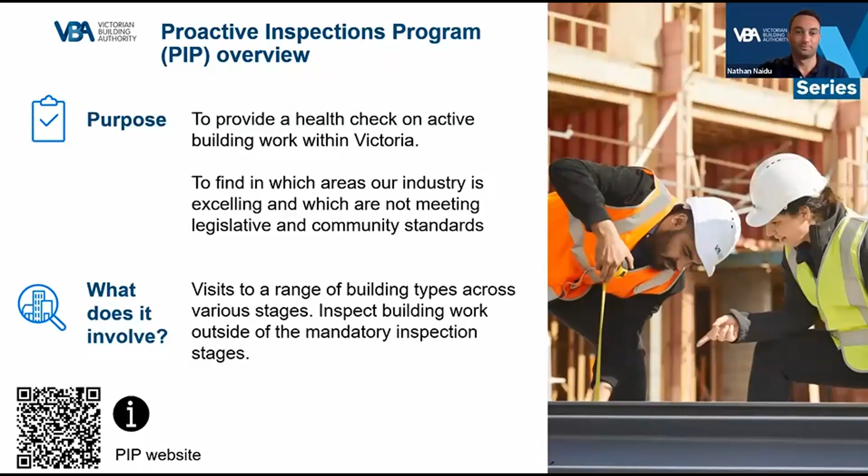Acknowledging that we are the Victorian Building Authority, post-COVID, the VBA have increased again their capacity to conduct inspections in regional Victoria to ensure we are able to assist stakeholders statewide deliver better and safer buildings. With initiatives such as the Build a Web program, we anticipate an even greater reach across Victoria over the next 12 months. It's becoming the norm for regional practitioners to have engagement with our field staff in regional Victoria.

Again, we've included a QR code at the bottom left corner of the screen, which will take you to further information about the Proactive Inspections program.

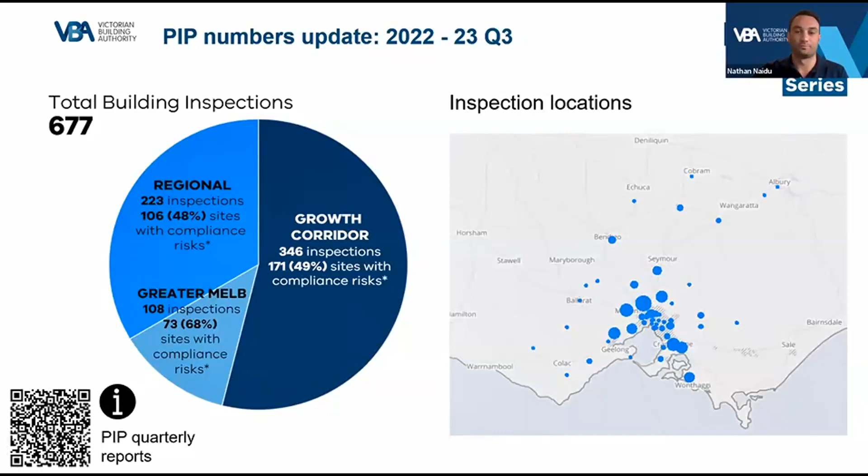Now, understanding our risk matrix. Each inspection conducted is assigned a risk level depending on the risks observed at the time of inspections. There are one of 4 possible outcomes for each inspection.

The first is a low risk pass. This indicates that no risk has been identified at the time of inspection and there are no apparent oversights in compliance. The second is a low risk.

This indicates a risk has been identified. However, we believe that the oversight in this risk will not cause significant harm to the project as it progresses and there is ample opportunity for rectification.

The third is a medium risk. This means a risk has been identified that, if left untreated, would cause an adverse effect on the performance of the building or compromise safety to the community. These are risks that are an oversight which should be attended to as soon as possible.

And lastly, we have a high risk. This means that a risk has been identified that appears to be a significant oversight and provides an imminent risk to the building or the community. In cases such as this, urgent attention is required to rectify the matter and the VBA will request a response within 7 days.

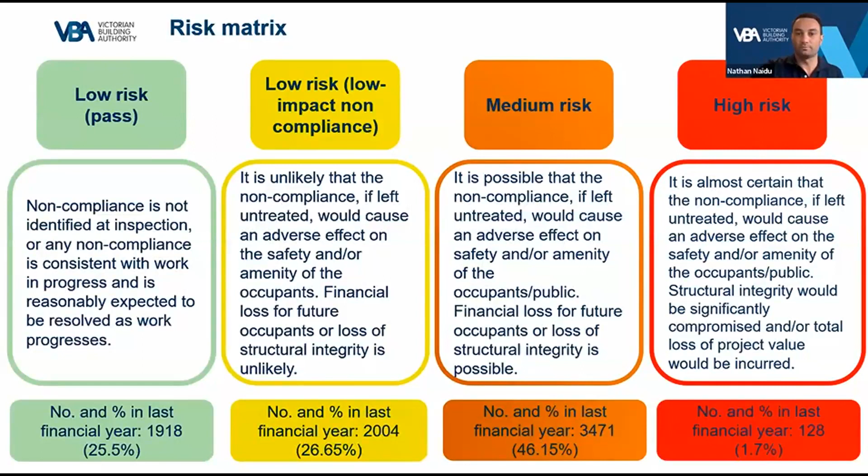Moving into the technical side of things, we'll start with slab reinforcement and concrete cover.

What is concrete cover? It's the thickness of concrete between the slab reinforcement and the edge of the slab, whether top, side, or ground. The two key purposes of adequate concrete cover are: first, it protects the reinforcement from the elements, safeguarding it from corrosion, with the concrete acting as a shield for the steel. Second, the steel remains well anchored within the slab, distributing and transferring loads effectively, allowing it to perform its best structurally. The end result of inadequate cover is a weaker slab.

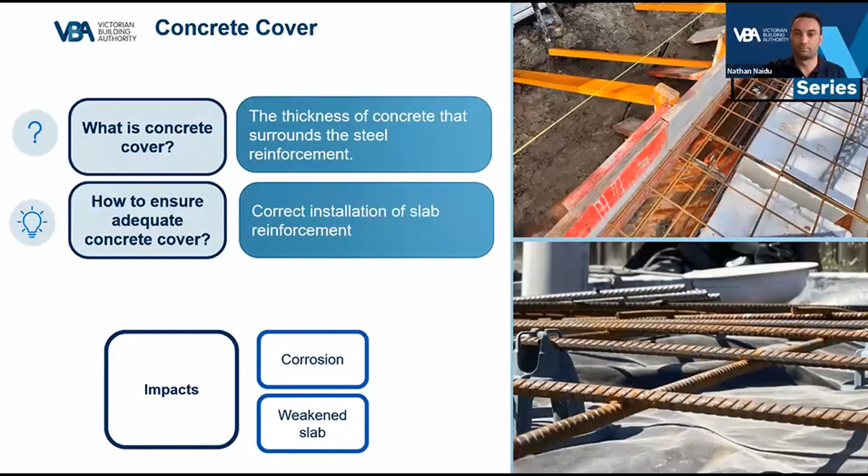The easiest and cheapest way to avoid issues relating to insufficient concrete cover is to ensure the steel is installed correctly prior to the slab being poured. The installation of even the simplest material, the humble bar chair, plays a crucial part in ensuring we achieve adequate concrete cover. The NCC requires the spacing of bar chairs to not exceed 800 mil, as well as steel to be supported off the ground, void formers, or waffle pods.

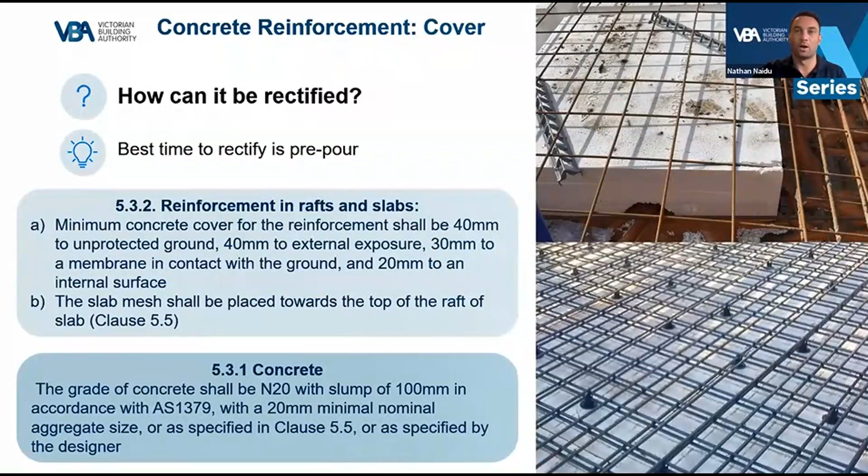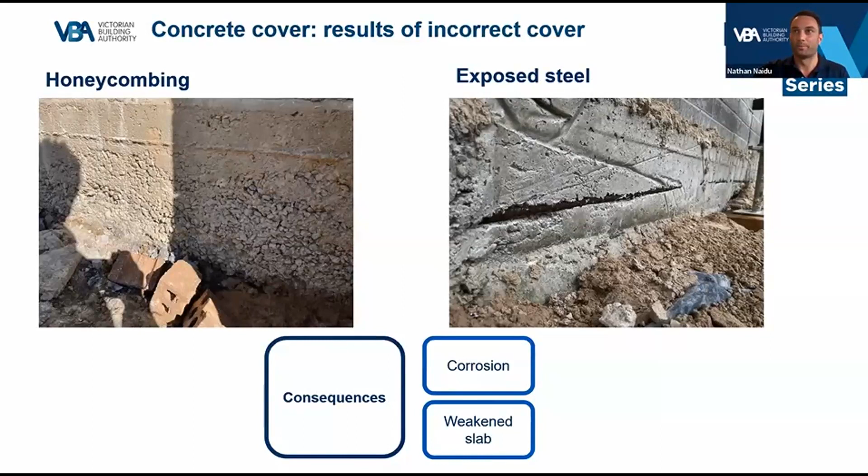Rectification works will likely involve cutting back part of the slab, treating the slab reinforcement, applying specially formulated products, and then rectifying the concrete finish. As you could imagine, the costs and time involved in obtaining rectification from your engineer, approval from your RBS, engaging a contractor to undertake those works, getting all the materials that you need, and then getting a re-inspection, those costs would be significantly greater than just getting the initial installation correct.

The photos shown are example only, and you would need to engage a design engineer and building surveyor for formal direction.

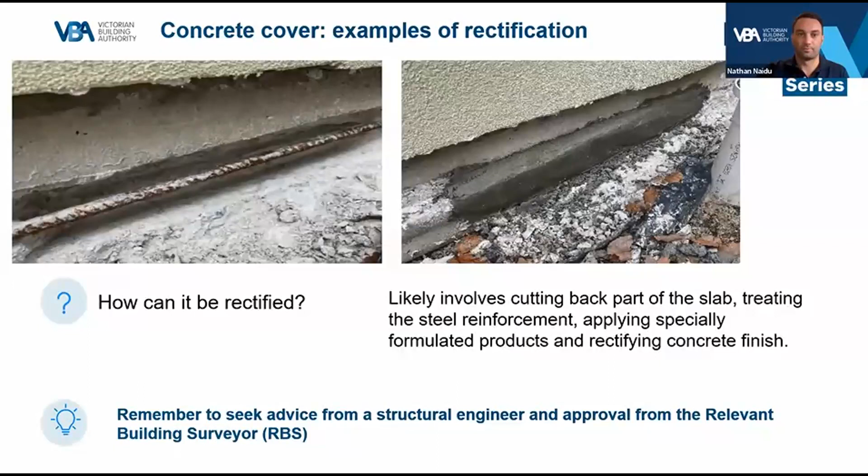Another common oversight we're identifying at slab reinforcement stage is the lack of additional steel installed where services penetrate the slab. Of course, having to cut steel to allow for a service penetration is unavoidable. However, whenever slab reinforcement is cut, that structural element is immediately weakened and additional reinforcement must be installed to restore that strength.

Although we know that cutting steel requires additional steel as per AS 2870, it is important to note that rectification works must always be designed by the structural engineer. In most cases, a detail will be included in the structural drawings for that project, and we simply cannot decide for ourselves what the appropriate amount of additional steel required is. You must always consult your structural engineer.

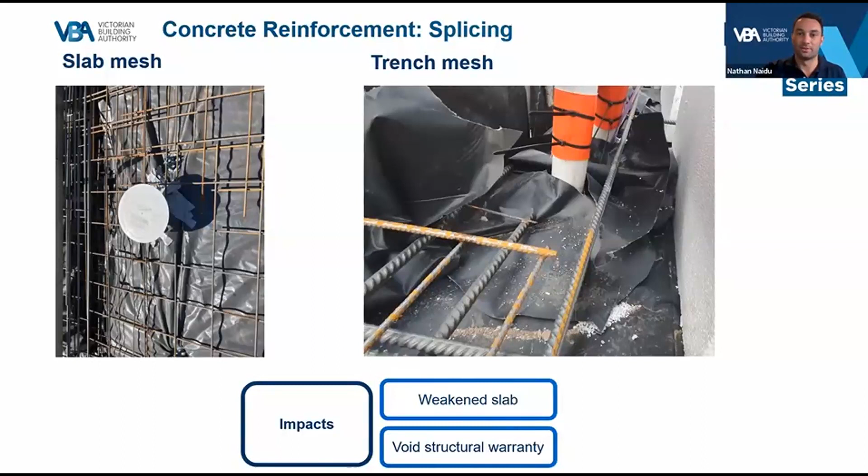If ever you are presented with a detail that does not include enough information for you to be sure that you are compliant, always contact the structural engineer for advice and do not make assumptions. If ever you observe slab reinforcement to be cut to allow for services, always check that additional steel has been installed and that the additional steel is in accordance with the design engineer's detail.

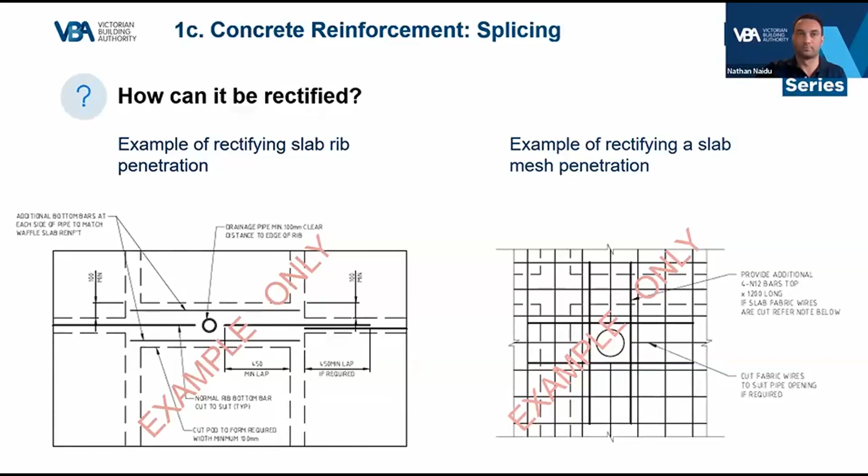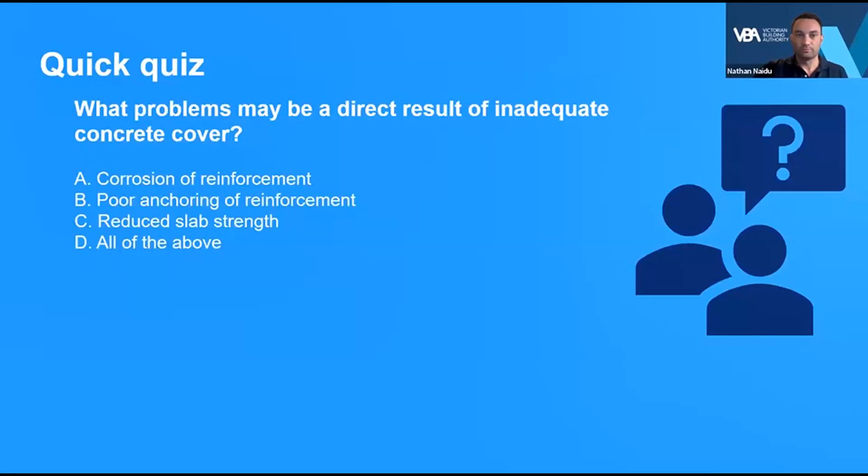For those that select D, you are correct. It is all of the above.

Moving on from the slab and onto the frame, particularly holes in frames.

Penetrations to frames are a common occurrence that, again, are almost always unavoidable. It is important to highlight that cutting any hole or notchings into the timber frame, namely load-bearing walls and braced non-load-bearing walls, have adverse structural effects that will weaken the frame.

Often, penetrations or cuts to the frame are made after the mandatory frame inspection, meaning that the building surveyor who oversees the entire project and the building inspector who did the frame inspection are not aware that these holes have occurred, which means that these alterations to the frame are not checked for compliance. There are many timber frame elements which may be compromised by rough-ins for services, elements such as studs, floor truss strongbacks, floor beams. However, for today's presentation, we're only looking at top and bottom plates.

AS1684 allows for a maximum hole of 25mm diameter to top or bottom plates of load-bearing or brace walls. Anything greater than 25mm will result in the frame's loading or bracing capacity being compromised. Holes larger than this require rectification to restore that strength.

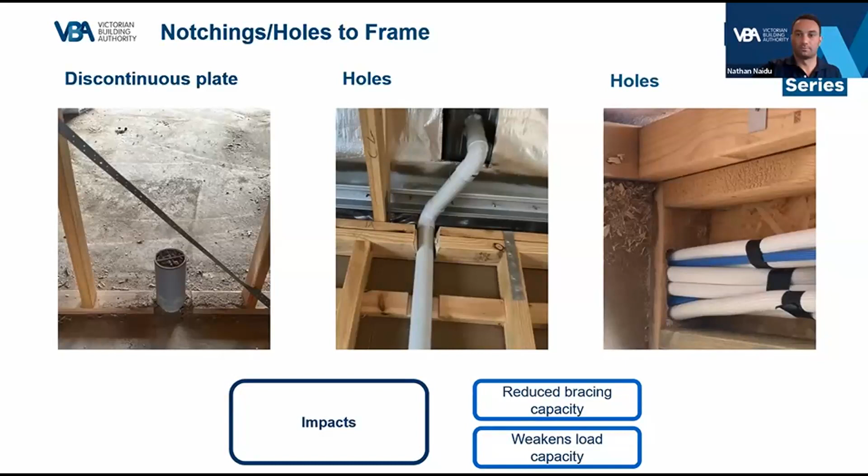Some of these plates must be installed prior to running the pipe through. They cannot be retrofitted. In some or most cases, you can't have more than one per stud bay, and they cannot be used in consecutive stud bays. They're also not to be used in stud bays where there are high loads, such as a girder truss or a point load block from an above floor.

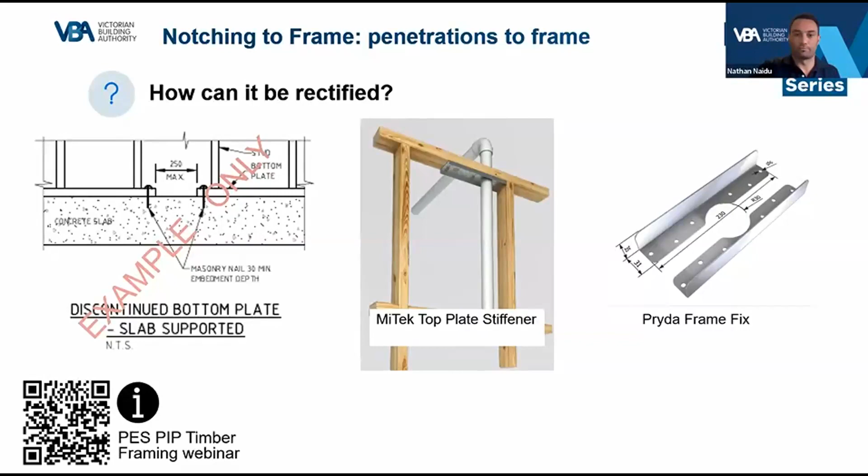Now moving on from the frame onto fire separation. Here we're going to focus on a particular aspect of fire separation, the fire separation at cantilevered walls. In modern development, cantilevers are becoming the norm in building design. However, this results in additional consideration in maintaining fire separation between the adjoining dwellings.

Maintaining the required FRL, or fire resistance level, must always be taken into consideration. This means ensuring none of the following are compromised. Firstly, structural adequacy: can the fire separating wall or party wall maintain its stability and load-bearing capacity in the event of a fire? Integrity: can the wall resist the transfer of flames, smoke, and hot gases from one part to another? And third, insulation: can the wall contain temperatures and stop heat transferring from one part to another?

The two elements I want to focus on today when discussing a cantilevered fire separating wall are the structural adequacy component and the insulation component.

When checking a cantilevered party wall, there are two important things to consider, as well as the overall installation of the party wall. Firstly, if either of the two dwellings burns to the ground, will the party wall remain standing? Secondly, are there avenues for heat to transfer via the supports to the adjoining dwelling? If the answer is yes to either of these two questions, then the FRL has been compromised.

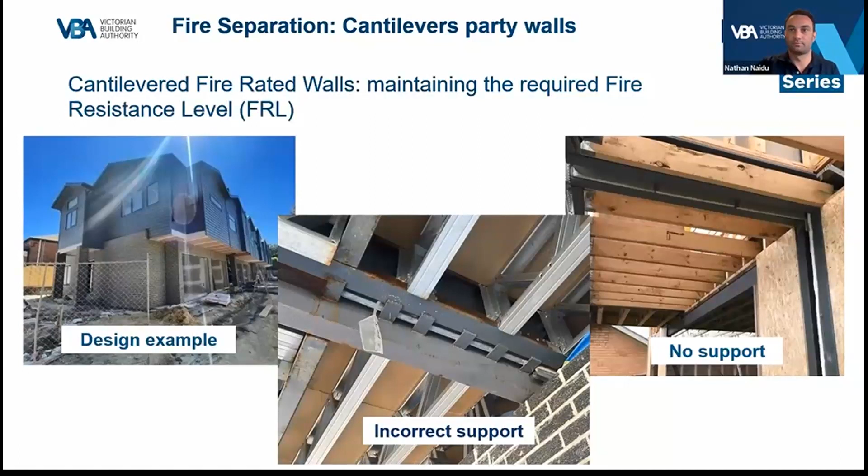Focusing on the support components only, here we have two different details from two different manufacturers: one from CBMA being the section detail on the left, and one from Hebel being the plan detail on the right, where they provide construction details showing how to support their respective party wall while still maintaining the required FRL.

These are examples only, just to help illustrate the rationale in supporting a cantilevered party wall with respect to the required FRL. I must also clarify that the floor beams and support plates must be designed by the structural engineer, as there are many variances that would dictate these elements, such as building height, wall height, roof type, etc.

If you look at the plan view detail on the right, the support plates are staggered, meaning they are fixed to alternating sides of the party wall. Each plate is fixed to one dwelling only, meaning heat will not transfer from one dwelling to another. This sees compliance with the insulation requirement of the FRL.

As those support plates are staggered and designed by the engineer, fixed on alternating sides, this means that should one dwelling hypothetically burn to the ground, the building left standing would still be able to structurally support that party wall and continue to be protected from the spread of fire. This sees compliance with the structural adequacy requirement of the FRL.

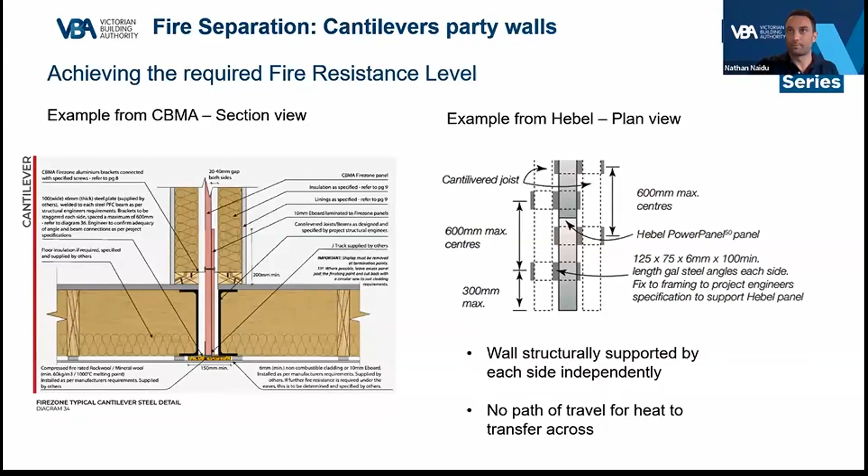Staying on party walls, but moving on to the aluminium wall clip component. Now, these clips are installed for the purpose of holding the party wall in place by being fixed to both the dwelling frame and the party wall. They have to be installed on both sides of the party wall.

Now, the Goldilocks theory does apply to the installation of these clips. And when I say that, I mean that it is possible to have too many clips and it's possible to have too few clips. The installation has to be just right and in accordance with the respective manufacturer's installation guide. If too few are installed, this means the party wall is not adequately supported and therefore does not achieve the required structural adequacy rating of the FRL.

These clips are designed to melt in the heat of the fire. So again, we need to ask ourselves, if one side burns to the ground, will the fire separating wall remain standing? If less than the required clips specified by the manufacturer are installed, we cannot be satisfied that the party wall will remain standing, and therefore the risk of fire spreading to the adjoining dwelling is increased.

Each manufacturer will have their own specification for fixing requirements of these aluminium brackets. For example, some require fixings along the top and bottom plate only and at nominated spacings. Some may permit fixings to studs if they're within, say, 20 millimeters of the top or the bottom plate. If you're using a shaft liner product, these clips must be installed to the H studs only. And if you're using Hebel, for example, those clips must be fixed within the center 50 millimeter line of each panel.

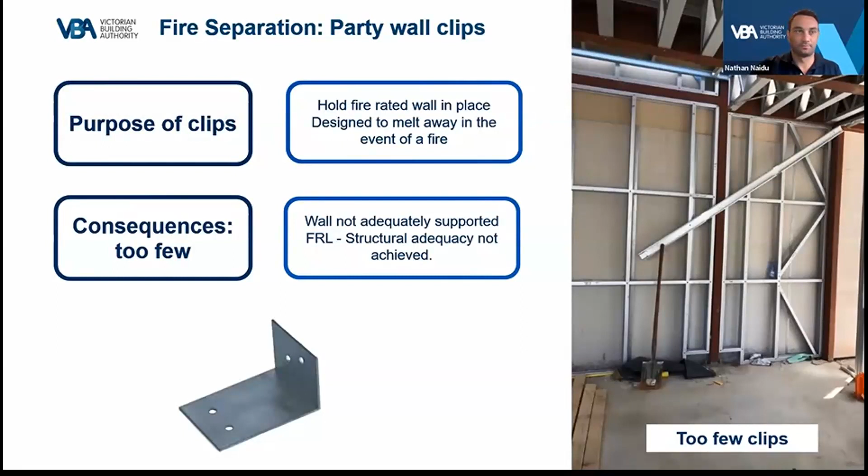By connecting our dwelling walls to the party walls, we must also consider the acoustic impacts from dwelling to dwelling. By installing these fixings, we are effectively installing sound bridges for these sound waves to travel from one dwelling to another. The NCC has a requirement to ensure sound insulation is maintained between dwellings, and each accredited fire separating system must also comply with the NCC's acoustic requirements.

The way that the sound insulation component is addressed is by ensuring that the aluminium wall clips are not excessively installed so as to not provide too many sound wave bridges between dwellings. It's kind of like a balancing act in maintaining both the structural adequacy of the party wall and the sound insulation requirements of the NCC.

Generally, aluminium wall clips cannot be installed along noggins or the mid-height of walls. However, there are some scenarios where the mid-height clips are permitted. These scenarios are triggered by usually the wall height. These scenarios also have strict requirements on the spacing of these intermediate clips.

For example, where a manufacturer may require intermediate clips along the wall, they may also require those intermediate clips to be no closer than, say, 1200 mil, and will also specify the consideration to discontinuous construction is required. This means considering the room type on either side of that party wall.

If ever it is observed that the aluminium clips are installed to areas not along the top and bottom plate, please ensure you refer to the relevant installation guide for that system and ensure that the acoustic requirements of that system are still adhered to.

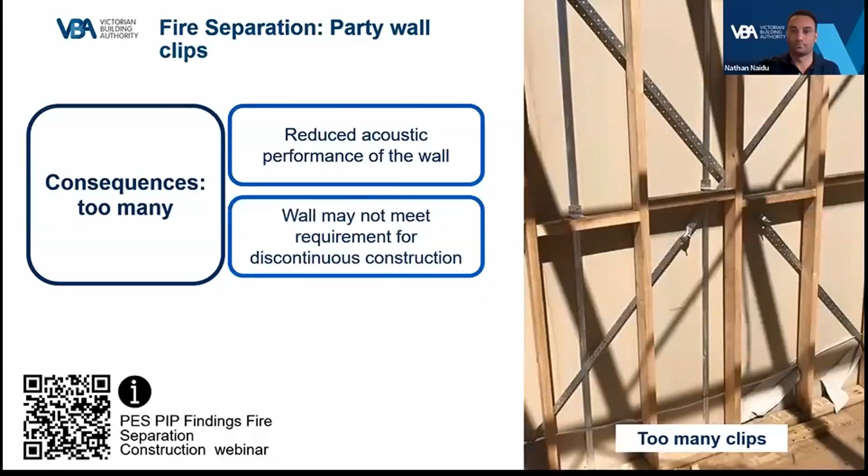Second quiz for the day. This one's a little bit trickier. Now, ignoring all the floor truss non-compliances and focusing only on the cantilevered party wall, does this cantilevered party wall appear to be compliant?

The answer is no, it does not. Firstly, while the steel supports appear to be solid, it is fixed to one side only. So if the dwelling on the left were to burn to the ground, that fire separating wall would come down with it. Also, we can see what appears to be a timber ledge sitting above that support. Obviously, timber is a combustible material and therefore would also contribute to the spread of fire.

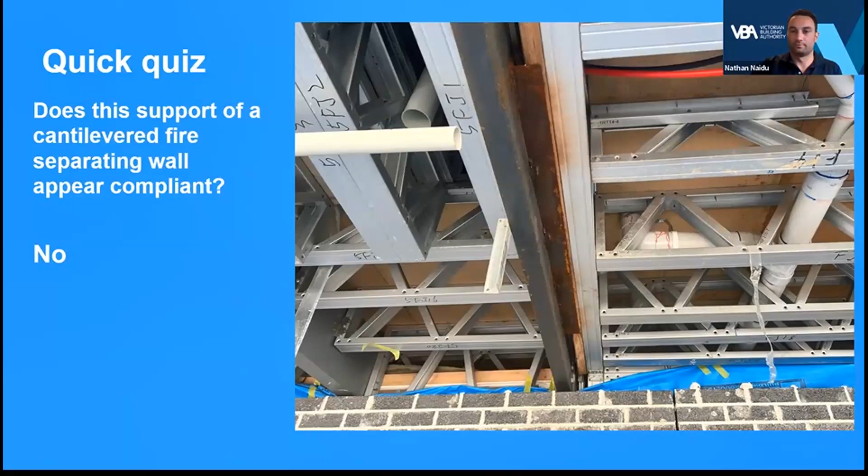The final topic I'd like to discuss today is water stops and preventing water from escaping wet areas. A common and crucial non-compliance we're continuing to see is the way water stops are being installed in wet areas, particularly at cavity sliders. For those of you who aren't familiar with this building material, a water stop is an L-shaped metal angle that is designed to retain water and keep it within the wet area. It's important to note that the water stop must work in conjunction with the waterproof membrane. Only when installed together and correctly, only then will the waterproofing system perform well in keeping water within that wet area.

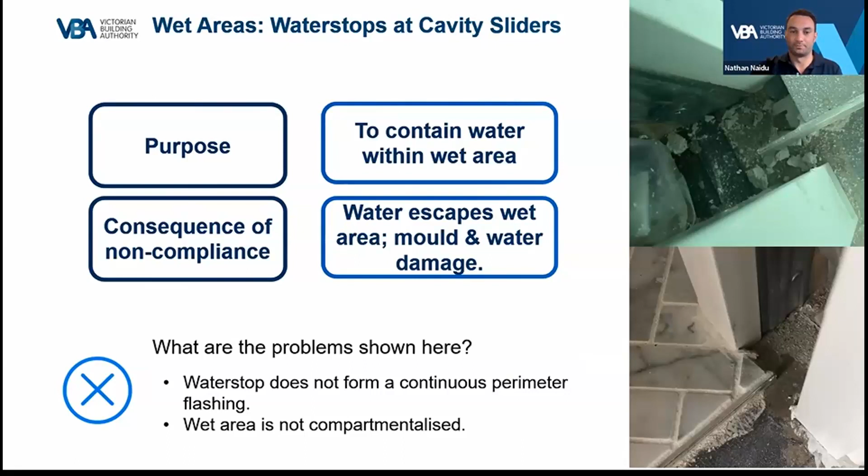If this is done incorrectly and identified after the tiles have been installed, rectification works would likely involve removing tiles, most likely destroying the waterproofing membrane as you're doing so, installing that water stop junction, reapplying your waterproof membrane, rectifying any damage you've caused along the way, and then reinstalling your tiles on top. As you can imagine, this will incur time and labour costs and frustrate every stakeholder involved.

When observing a water stop at the entry to a wet area, whether it be a cavity slider or a regular opening, ask yourself: does the water stop connect to the perimeter flashing? And are there openings for the subsurface water to escape that wet area? As we all know, it only takes the smallest of openings for water to begin getting into places we don't want it to get to.

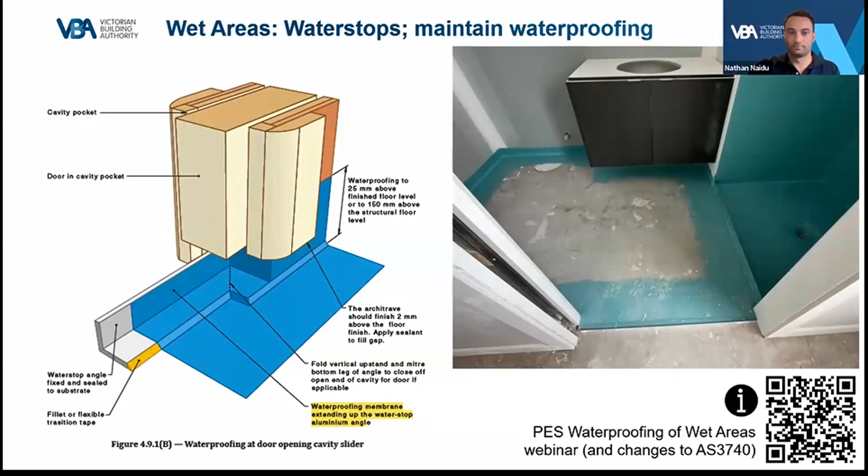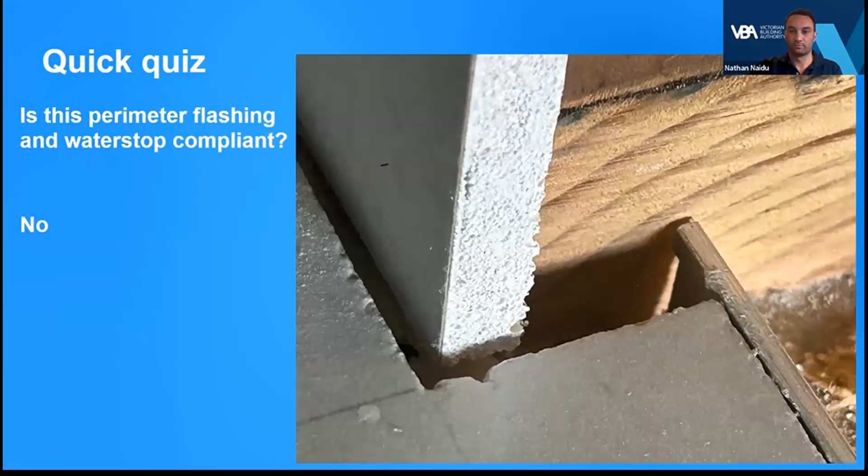Wrapping up the topics we've touched on today, we've learned about the purpose of concrete cover, the consequences of cutting slab reinforcement, the impacts of drilling holes into frames, how to ensure the FRL is maintained in a fire separating wall, consideration to sound insulation particularly at party walls, and ensuring water is kept within wet areas. In providing insight to these common non-compliances we are seeing, we hope this will help in the prevention or even early detection of non-compliances. By understanding the rationale behind why something is not compliant and the impacts of that non-compliance, this allows us to exercise better judgment when observing building work. The more we understand the principles behind our building code requirements, the safer and better our buildings will be.

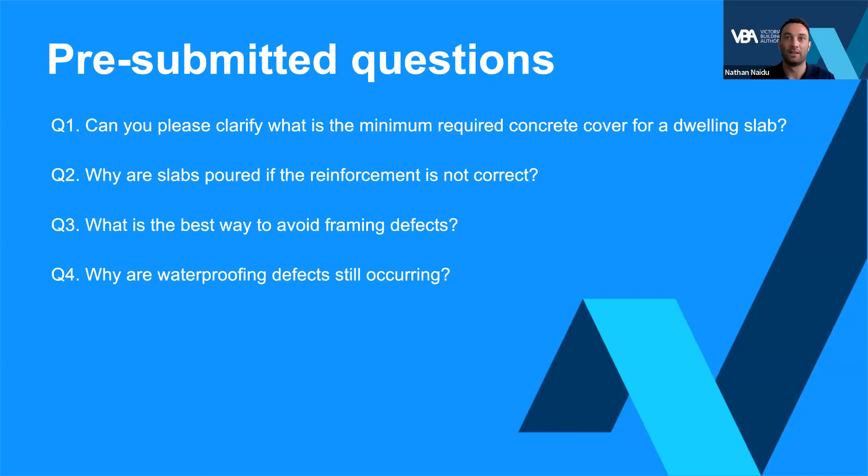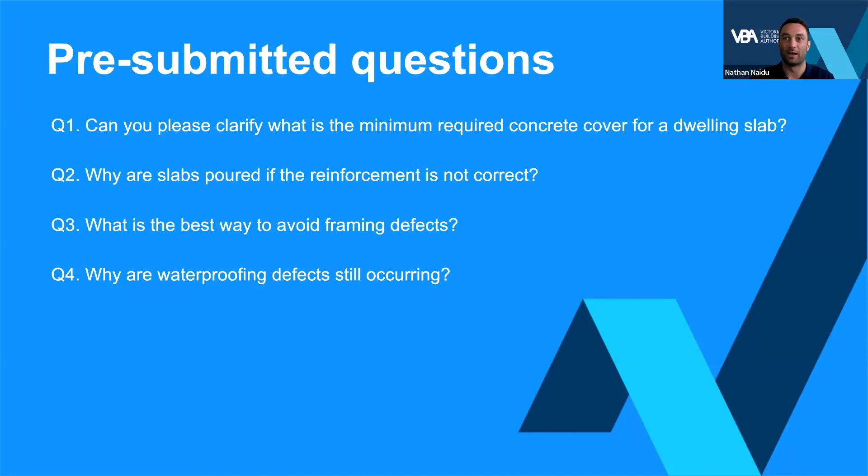Also want to point out that while waterproofing doesn't yet form part of a mandatory inspection, in the latest 2021 edition of AS 3740, there is a clause that requires a visual inspection to be conducted of that waterproof membrane prior to installing any tiles or vinyl. It's much easier to identify and repair any incomplete or defective membrane prior to installing the tiles, so I strongly recommend treating this inspection with the utmost importance moving forward.

Question 5: at which stage of the building do the proactive inspections team aim to do their inspections?

Yes, it's a very good question. We do understand that because we have the ability to conduct our inspections outside of the mandatory inspection stages, we should utilise this where possible. We don't want these inspections to be another mandatory inspection. Myself personally, I prefer to conduct these PIP inspections at stages such as post-roughing frame, pre-plaster, fire rated wall stage, and even checking waterproofing as well, including your substrates. Purely because these inspections don't form part of a mandatory inspection and they're not checked for compliance formally.

Regardless of what stage it's at, it's always good to get another trained set of eyes over the job, to look out for any defects that may be an oversight from the builder, site supervisor, drafty, inspector, or RBS. It's always good to get another set of trained eyes over it.